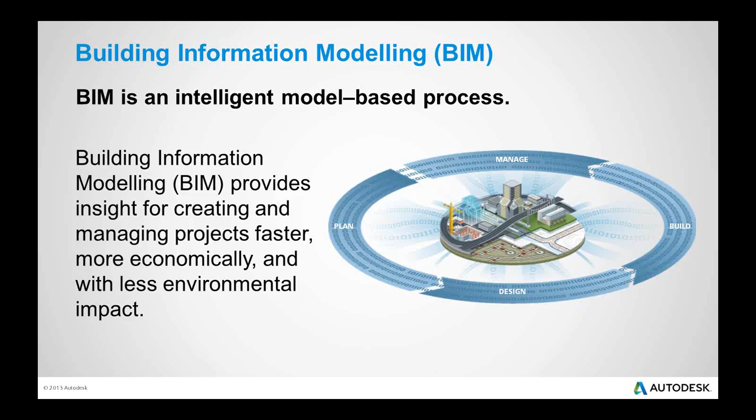Now, to introduce you to Revit LT, I'm going to be using a project, and I just want to give you a little background on it. This is a church in northern England that was renovated into apartment buildings. AutoCAD was used for some of the designs, and then Revit for some as well. I'll be using a Revit project to show you some of the things you can start looking at with Revit LT.

All right, let's go ahead and switch over to Revit. Now, if you are familiar with AutoCAD LT or AutoCAD, I may be using the terms interchangeably, but I'll try to be specific if there's something particular to one versus the other. In general, what I'm going to do is take you through and compare what you might be familiar with in AutoCAD LT to what you can expect if you begin using Revit LT.

Before I get into the details, I want to take you into a project, one of these apartments that has been completed or close to completed in Revit, and show you some of the power of BIM, of using this intelligent model-based design.

So it kind of looks like an AutoCAD drawing. If you just look at the floor plan here, we've got some standard architectural elements, our walls, windows, and doors. I'm going to zoom in to part of it here with this one room.

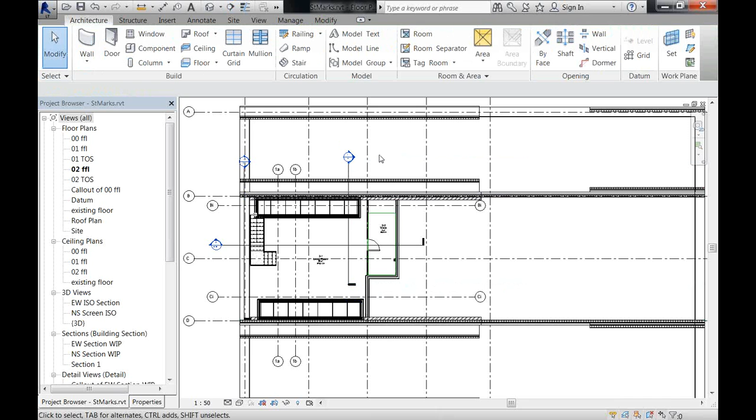So just that easy, I was able to create a section line, and not only did it draw the section line, which is what I might do in AutoCAD LT, but it actually created the corresponding view. If I double-click on this section tag, it automatically opens up that section view. This is similar to creating different views or maybe different DWGs in AutoCAD, each one having the geometry you want to look at for that particular section, plan, or detail view.

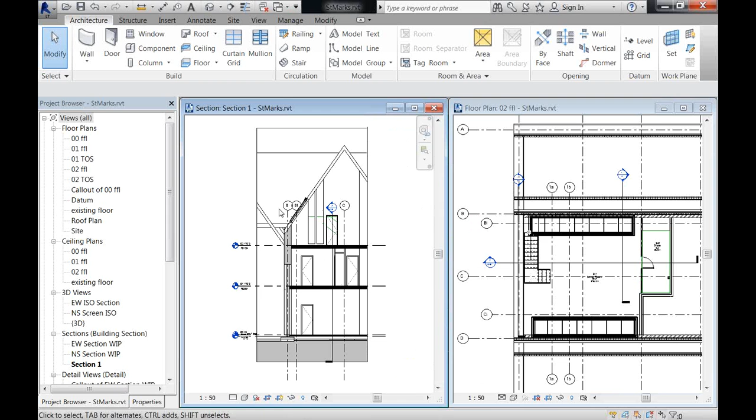I'm going to go ahead and tile these so we can see both drawings that I have open, and I'll zoom. Now, of course, this is completely controllable how much you see of the view. So very intuitive using grips.

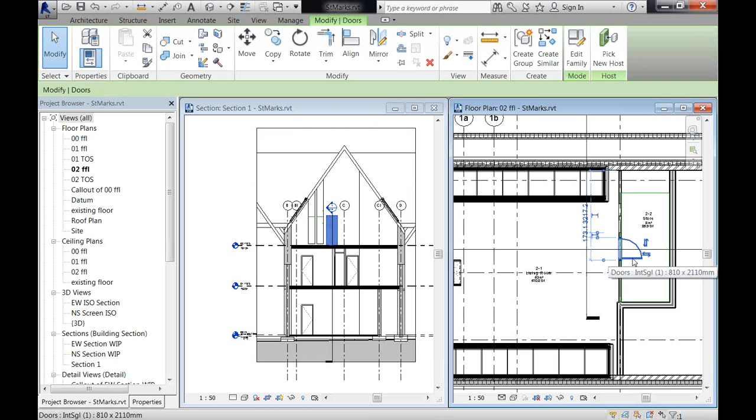Now, the power of BIM, as opposed to something more traditional with 2D CAD, is that these are all looking at the same geometry. So if you want to make a change — and we know that never happens in the architectural world, right? You've designed all these drawings, maybe you've got details and sections and all these different drawings about this particular room and this door, and now somebody realizes that the door needs to move.

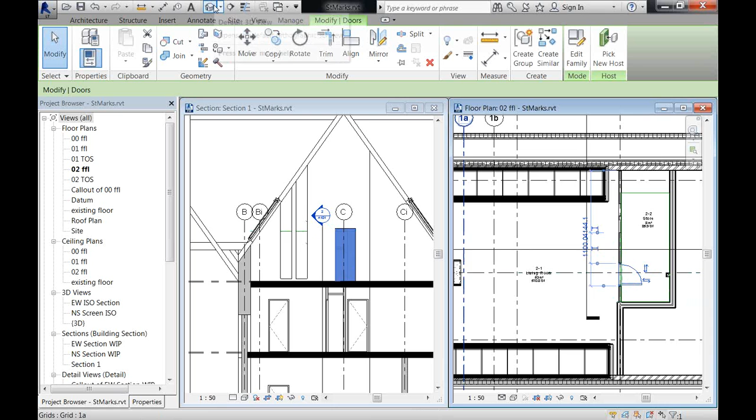So here in Revit, I'll just go ahead and select that door and move it down. And you can see that not only in my 2D plan does it move, but it also moves in the section view. And in fact, I can even open a 3D view of the drawing or this model.

I'll go ahead and tile that, and we can see that if I go ahead and select that door again, it selects it in every view. I can move it in any of these views. So previously I moved it in the plan view, but I could also, maybe for a better design idea, select it and move it in my section view.

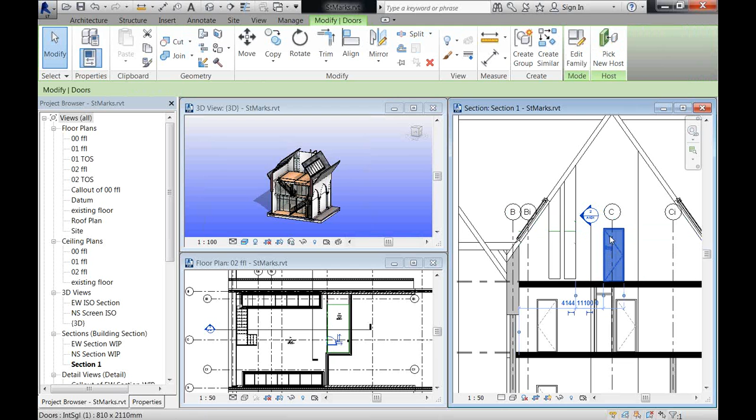So I can do that, move it further down. Or if I'm looking at my 3D view, I could also select it and move it in there. So whatever makes more sense — in any of these views, you can be modifying and editing your design and know that it's going to update.

Oops, I think I just deleted it. Let me undo that. Know that it's going to update in any of these views. So this is just a small example of the many — you can imagine this whole design, how many of these different related objects, windows, doors, walls, roof, ceilings, floors, all of these are related to each other here in a BIM environment.

Now just think of doing this in your two-dimensional AutoCAD LT drawing.

If you were to do something as simple as moving a door in a 2D plan, not only would you have to move the door, which would likely be a block in AutoCAD LT, but you would have to trim, extend and completely clean up this wall so it looks appropriate once you've moved that door. You can see here as I'm moving it in Revit LT, that it automatically cleans up all that geometry, in addition to cleaning it up in all those other views.

So that's just a quick look at a finished, or closely to finished, model in Revit LT. But if you're like me, you might look at this and think, well, that's great, it's all magic, but that's when somebody's already done all the work. So what I want to do is take you into a brand new drawing starting completely from scratch in Revit LT, and we'll just look at some of the similarities and differences compared to working in AutoCAD LT.

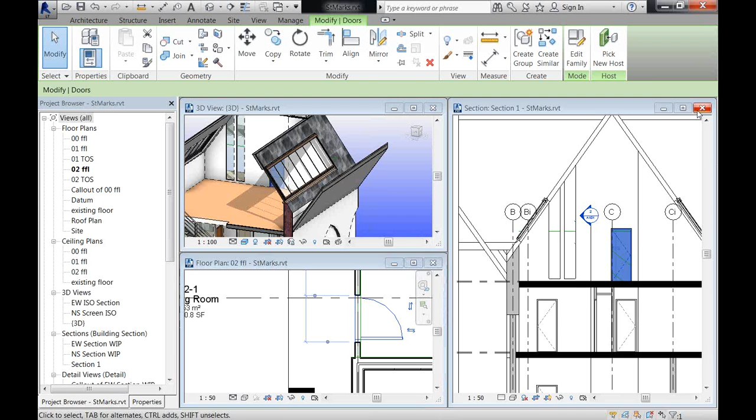So we'll go ahead and close these. And this will take us back to the default interface. As soon as you launch Revit LT, this is what you see.

Now this can look a little bit overwhelming if you're used to AutoCAD LT, because it does look different. But let's just take a look at what these different areas of this screen are.

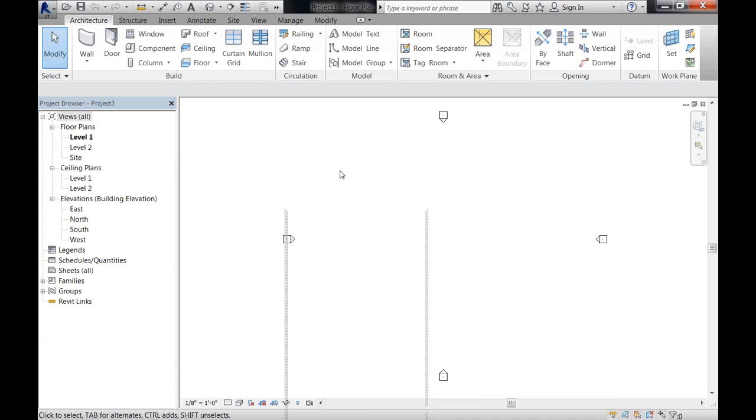So here I have the properties palette. I'm just going to drag it out so that it's separate. This is what we would probably see in AutoCAD LT, where we would have multiple different palettes that we could have open. In Revit LT, you can do that too. So I could drag this palette over and actually have them kind of stacked, visibly stacked.

But in Revit LT 2014, something that's different than what we can do in AutoCAD LT is that if you drag one palette's title onto another palette's title, they actually tab. So here I've got tabs to switch between my different palettes. That's kind of a neat feature that's more unique to Revit LT. So you'll see that I'll switch between these different palettes.

All right, so those are some of the things that are similar to AutoCAD LT. Let's go ahead and just start looking at some of the differences.

Here, our main tab in Revit LT is this Architecture tab. And if you dig deep, you'll actually see that you have tools similar to what we're used to in AutoCAD LT. If I go over here to this Model Line tool, for example, and click on that, it displays this contextual ribbon tab. I can see that it's contextual because it's green. I've got the green ribbon tab here, and I've got these green panels over here at the right. You may be familiar with that from AutoCAD LT as well.

There are certain things you can do in AutoCAD LT where you'll get a contextual ribbon tab, such as using the array, associative arrays, or hatching. So it's the same idea here in Revit LT.

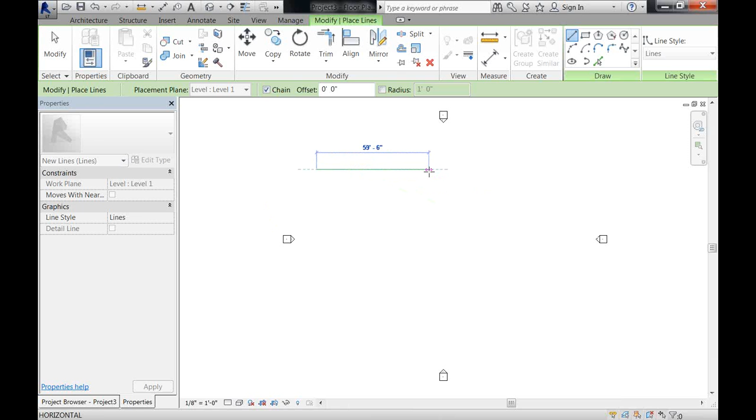For example, I have all these tools over here where I can draw a line. Let me go ahead and do that. Drawing lines and circles and arcs feels very similar. We pick our point, we can drag and type a value, and we can get the angle, just like our polar angles in AutoCAD LT. So this process, whether I'm doing lines or walls or other geometry, should be very familiar to you.

Here I've got my arcs and circles and other geometry that I can create. Okay, but this is just plain old geometry like I would have in AutoCAD LT. And that's not really taking advantage of the power of Revit LT, the power of BIM, which is those intelligent objects like walls, doors, and windows.

So while you can get into these tools, and there is a reason to use these tools, maybe you're creating a custom window shape, for example, and you need to design that window shape. You can do that with these tools and then create what would be kind of compared to a block or a family like I described previously.

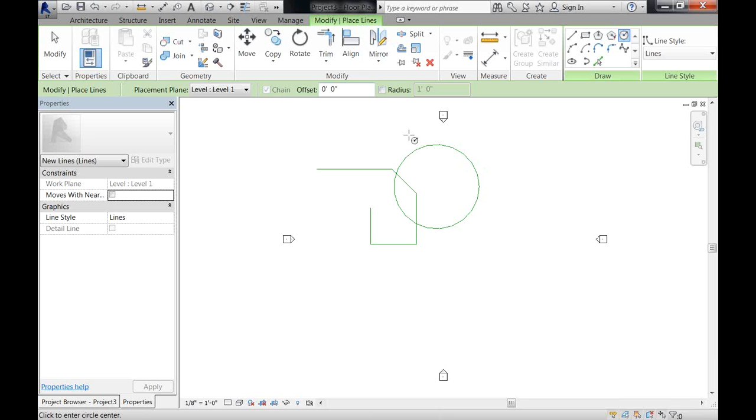Okay, but I'm going to go ahead and get out of this mode. So again, I know I'm in this contextual mode because of the green. If I want to get out of it, I can either press the escape key a couple times, once or maybe more, or you can always go over here to the left side.

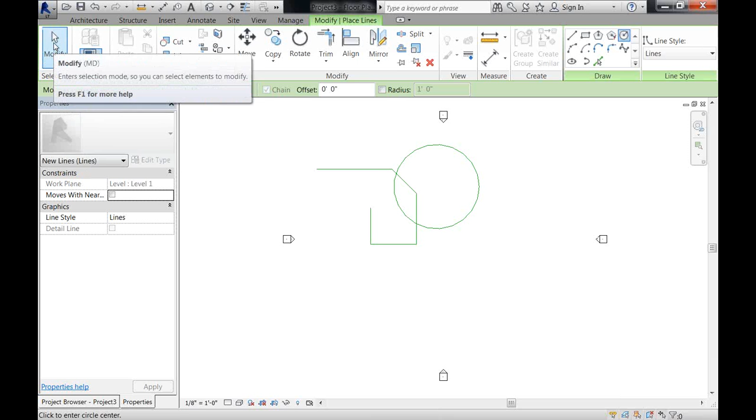Here I've got this Modify tool, and if you think about it in AutoCAD LT, whenever you're not in a command, you're always in this default selection mode where you can select an object and then do something to it. That is kind of what this is. Here we see it. We've got the Select panel here and Modify. So if I click on that, that is taking me to what would essentially be the blank command line in AutoCAD LT. Okay, so it's got no objects selected. I'm not in anything contextual, and it's the same as pressing the escape key a couple times.

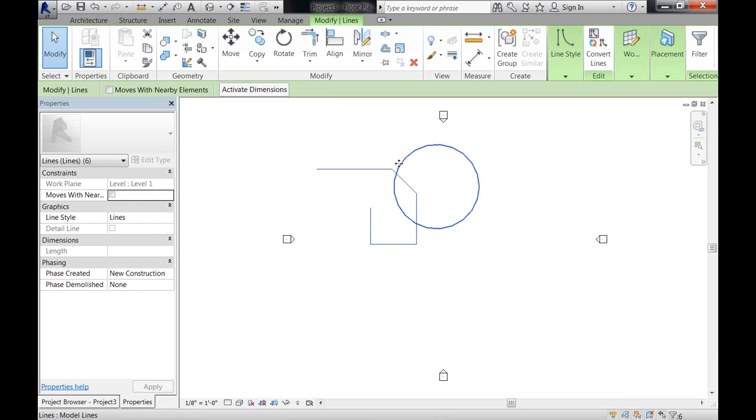Okay, so here I've got some geometry, but I'm going to go ahead and select that and get rid of it because this isn't really smart geometry. So selecting is very similar to AutoCAD LT. You can either pick an object or you can do a window, an implied window, right to left or left to right, depending if you want to cross objects or have objects fully selected. So all of that is very, very familiar.

I'll just go ahead and select those. I could right-click and choose delete, or we can use this icon up here, which is the delete or erase tool. Okay, so selecting should be very familiar to you.

All right, so in the drawing area, one thing that you might notice are these little icons indicating elevation. So by default, using this particular template, the default template that I used, it automatically created some elevation views, and it put in these icons so that those elevations will be marked.

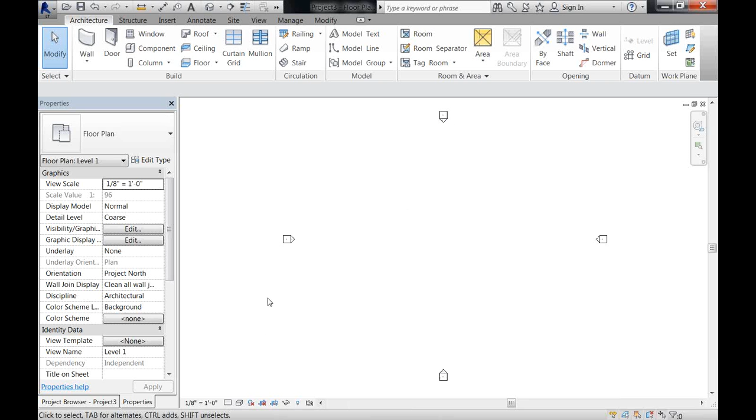Now, right now I have my Properties palette selected, so I'm going to go over here to my tabs and choose the Project Browser. And you can see that I've got these different elevations listed. So this is my north, south, east, and west elevations, and that's what these icons are indicating. We won't look at that right now because there won't be anything in it. Let's go ahead and draw some walls so that we can actually see something there.

All right, so since we're in this intelligent BIM application, Revit LT, instead of drawing lines, arcs, and circles, we want to draw intelligent walls, doors, and windows. And we'll go up here to our wall tool. And right off the bat, I can start drawing just like I would be drawing maybe a DLINE or an MLINE in AutoCAD or AutoCAD LT. So you see here it's showing 2 lines right here.

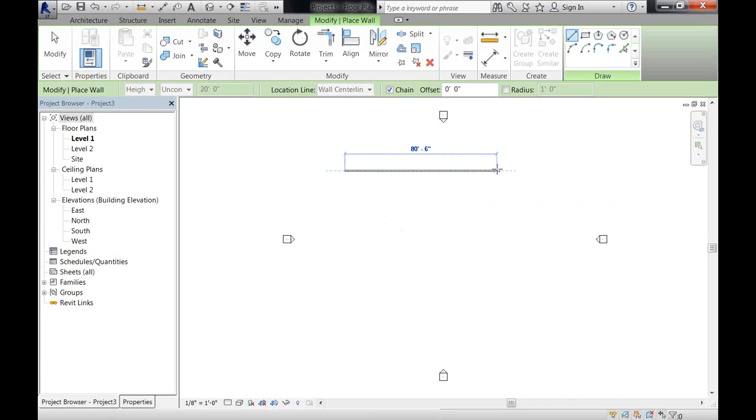And again, I can type values. I can use my object snaps. I can eyeball it. The nice thing is that if you're just trying to sketch out a design, it's really easy to modify later. So you can really focus on the general idea of your design and not worry too much about values because it's so easy to select and modify objects later.

All right, so I have some lines or walls down there, which is similar to my D-lines or multi-lines or lines that I have offset in AutoCAD. Now, one thing to point out that kind of threw me is, again, this contextual tab up here. In AutoCAD, if we were drawing lines or walls or double lines or something like that, once we finished placing those, we would automatically be back to our default command line.

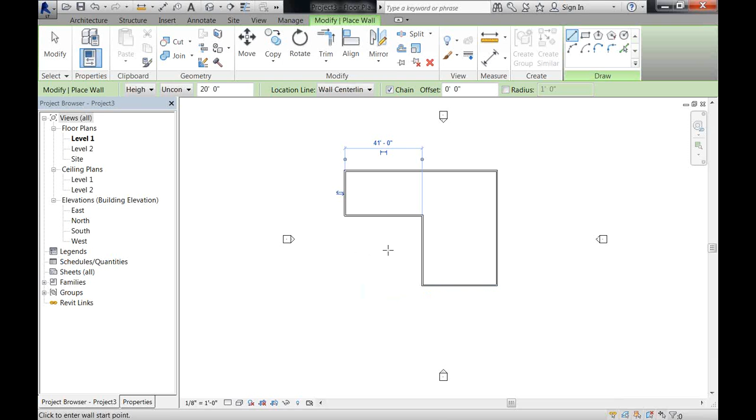But here in Revit, we can continue drawing these walls, and we stay in this contextual wall creation mode until we tell it we're done. So even though I'm creating various segments over here of walls, I'm still in this contextual mode that I can see up here by the green. Go ahead and undo that crooked wall that I just created.

So something to be aware of: if you're trying to maybe select one of these walls and try to move it, which is something we might do in AutoCAD LT, just realize that you're still in the contextual mode. Go ahead and press Escape or hit the Modify tool so that you get out of that contextual mode. And then you'll be able to select those objects just like you would expect and modify them very easily.

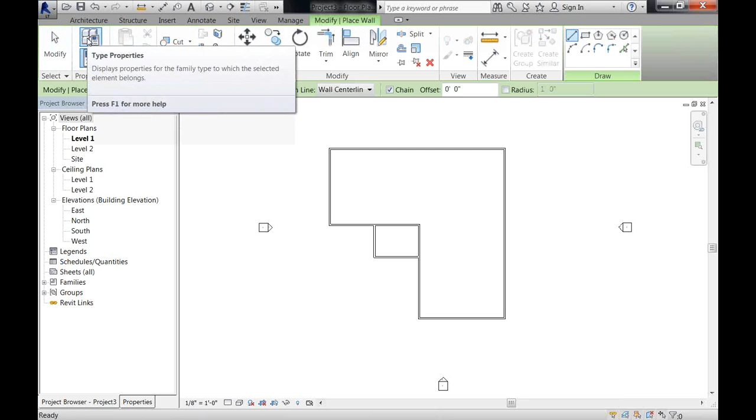Okay, so very, very easy. Don't have to do cleanup. The walls automatically clean up themselves. All right, so let's go ahead and create another wall, and I'll point out some of the other differences with Revit LT compared to AutoCAD LT. As we were creating the wall, we see this right here, this options bar that has tools or values that I can apply to that wall that I'm about to create.

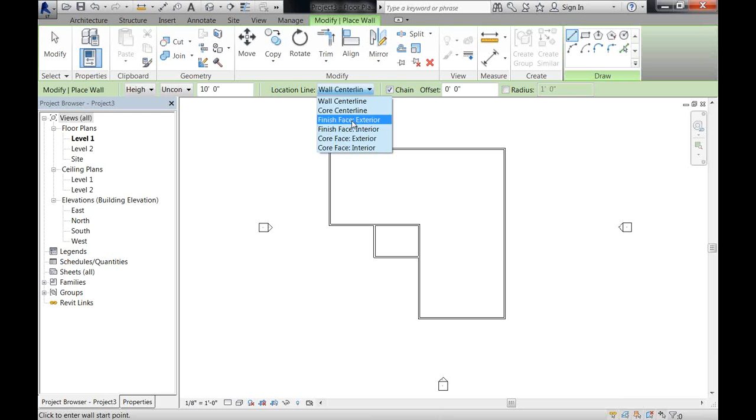So by default, for example, it created a wall that was 20 feet high. Maybe I don't want a 20-foot wall. Maybe instead I want a 10-foot wall. So I'll go ahead and change that value. As I was drawing these walls, they were drawing from the center line, but maybe I actually want to draw a wall that's from the finished face, we'll say the finished face exterior. Let's try that one. Okay, so you can modify these options, and if you don't modify them here, the great thing about this environment is that you can always select these objects and change their properties later.

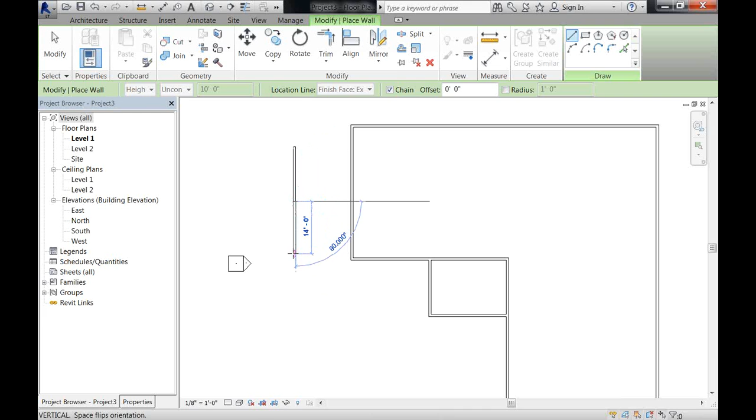But I'll go ahead and just pick a point to start drawing this wall, and you can see now instead of drawing from the middle of that wall, it's now drawing from the exterior face. I'll go ahead and pick the point and just finish off that wall. And if I select that wall, go back to our modify mode so that I'm in the selection mode. Now notice when I select that wall, I've got different icons here indicating, so when I drew it, it said that it was the exterior face.

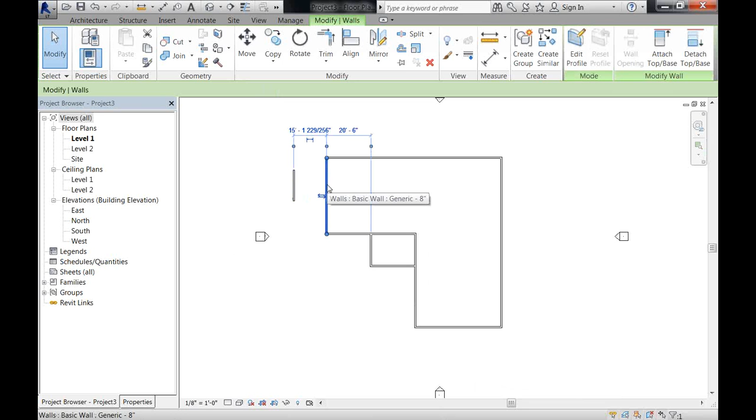That actually becomes important here in Revit LT compared to what we're used to working with in AutoCAD LT, because these walls have intelligence. There's an inside, there's an outside. Maybe we've got brick on the exterior and drywall on the interior. You actually can control what is the inside and the outside, and we'll take a look in a little bit at the materials and how those are defined. Okay, but again, the way that you work with it is very similar to AutoCAD. You select objects, you can modify them with grips, and in Revit LT, there's various different icons.

I'm going to go ahead and move this wall, just rotate it around a little bit. I want to see the height of it from this view down here. Okay, so we drew these various walls, and this one happened to be 10 feet, whereas the others were at the default 20 feet. Now let's go ahead and take a look at these different views. Here's the east elevation. There we've got the south elevation where you can see that 10-foot wall compared to the 20-foot walls. So we've got this 3D for free.

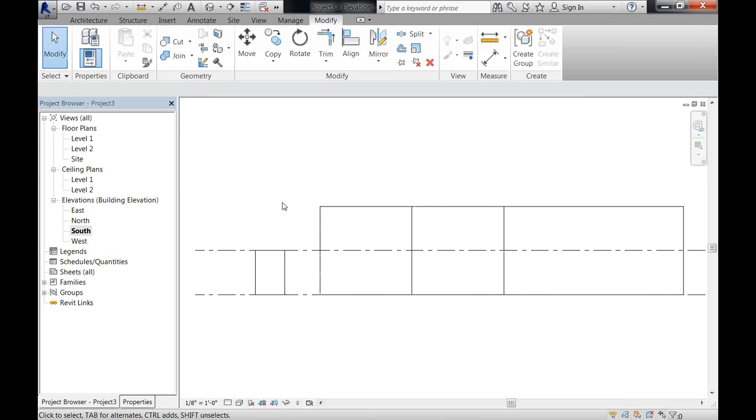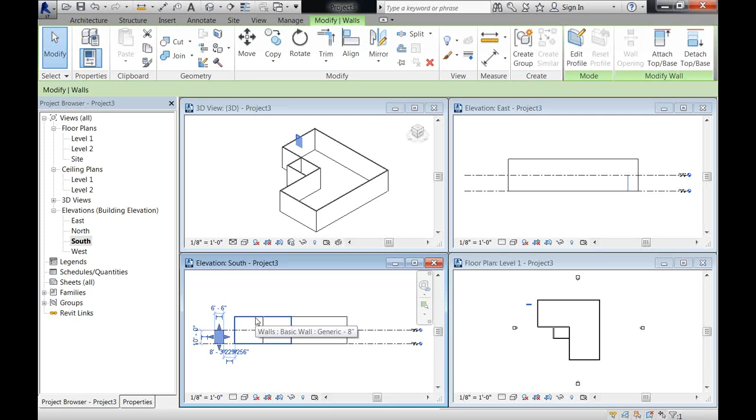If we go up here and look at our 3D view, and I'll go ahead and tile everything that I have open. So I've got my 3D view here and my different elevations. Even though we were drawing in the floor plan and creating it very much like we would in AutoCAD LT, it comes along with this height and these 3D properties just by default, just for free. So you do have to think about it. If you do want a wall that's 10 feet as opposed to 20 feet, or you want it to go from one level to another level, then you do have to think about it. But you have to think about that anyway.

If you're creating a project in AutoCAD LT, at some point you're creating the floor plan and then you're creating elevations and sections, and you have to think about what materials that wall is going to be and what height and how it's going to meet with the roof and what all of that is going to look like. The difference with working in a BIM environment with Revit LT is that you're thinking about those things as you design, so that when you're done, it's generating these different drawings, these elevations and sections and plans, and it has all of those components already together because you've been actually designing the way that you think, which is 3D.

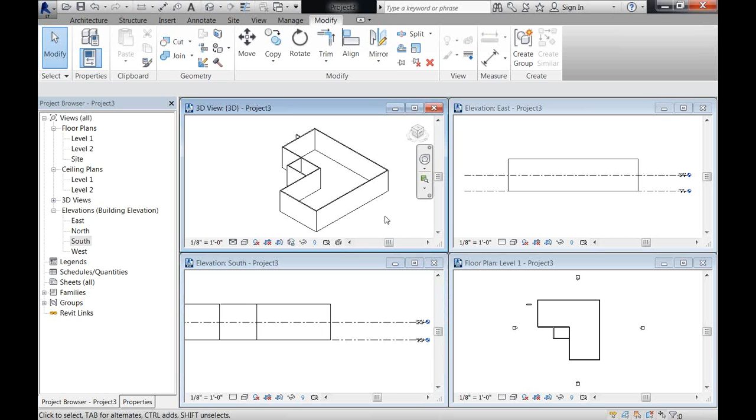Okay, so let's go ahead and take a look at some other things here. All right, so all we did so far is draw some walls.

Let's go ahead and zoom on that. And again, I'm using familiar tools like double-click the mouse wheel to zoom extents or roll the mouse wheel to zoom. It's all very familiar if you've been doing that in AutoCAD LT. So we have these walls. Now let's go ahead and insert some doors and windows.

Now in AutoCAD LT, we would insert blocks. And if we wanted to insert a door or window, say in the wall here, we would have to trim those lines away and clean it up. And if we moved the door, just like I showed you earlier, we would have to re-clean up all those lines. With Revit LT and these intelligent objects, it's much easier.

So we go to the Architecture tab. I'll go ahead and select Door. And if I go to the Properties palette, we can see a preview of what this door is that I have currently selected. And we can change the type of door or the different options, the sizes in this case. So here I can see different size doors that I could choose from. I'll just go ahead and select one of those.

And I'll insert it here. Now notice as I drag from one side to the other side of the wall, it changes the position of the door, which way it's flipping or opening. Okay, so I've inserted that door, but you may look at this list and think, well, that's not enough. I need other doors. That one's kind of simple. It's the same idea as with AutoCAD LT, and you have your block libraries. You can either purchase libraries, or it comes with some symbols, or you can create your own. In Revit, these symbols or objects that you use frequently over and over again are called families.

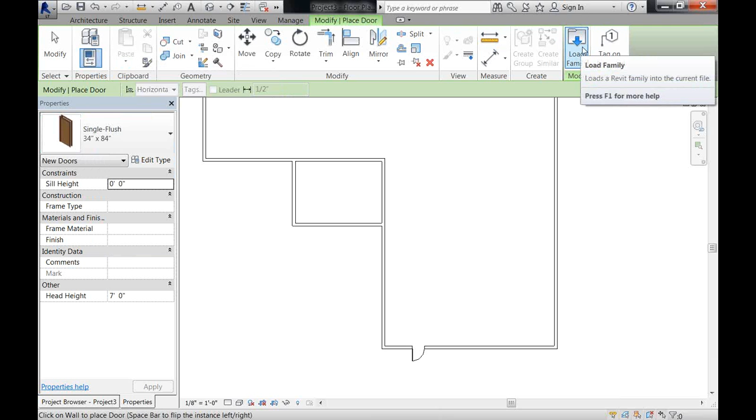So if I go up here to the door and I decide that one door style is not what I want, I can come over here to my contextual tab. Notice that it's green. I'm in this contextual mode. And I can choose Load Family. So I happen to be working with doors, but you can see here when I choose Load Family that there's all kinds of data out here. I can go into lighting or plumbing or windows. There's all kinds of different symbols or libraries that I can choose from.

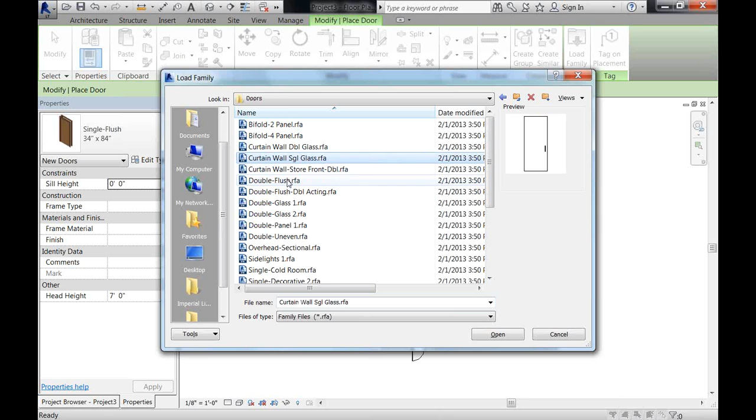Okay, I'm going to go to the doors, and here I can see different previews. It's got a double door with glass. Maybe we'll try that one. Okay, so it's kind of like inserting a block from some external file. You insert it into your AutoCAD drawing, and then you've got that block definition within your AutoCAD drawing to use. Similar idea here in Revit LT. I've just loaded this family. Now I have that definition in my drawing, and I'll just go ahead and insert this one version of the door right there.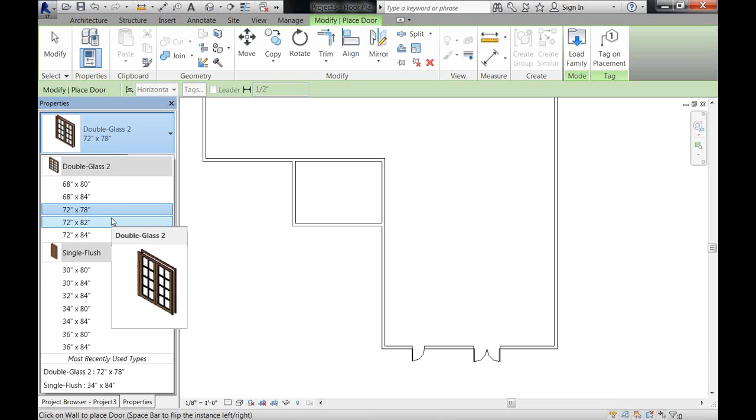But not only is this just one version of the door, we can see here, if I go into the drop-down list, that this double glass door has different sizes associated with it. So you can sort of think of that in AutoCAD LT as having dynamic blocks that you've defined. But again, these are much more intelligent. Okay, so here I've inserted my doors. I can do the same process for windows and other architectural components. Insert a window. I'll just insert a few of them while I'm here.

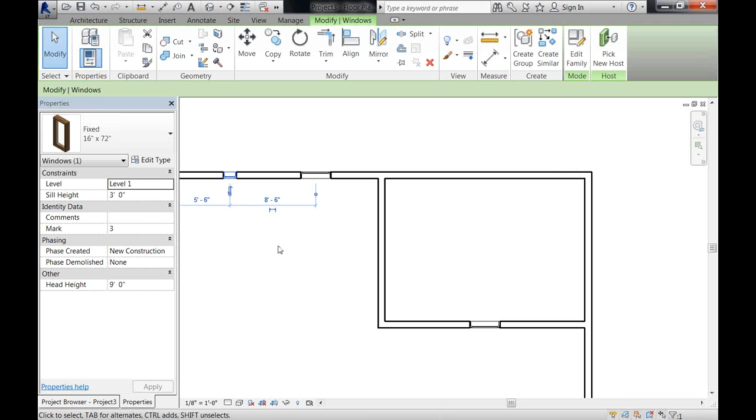Now, if you've inserted it and something's wrong, for example, I inserted these windows and maybe I don't have it going the right direction. If I select that window, notice it does have a directional component, just like our walls. So I can flip where that window is. I'll flip one direction and leave the other one the other direction. If it's not the right size, I can go in here and change its size. Let's do a small window for that. Okay, so easy to change, selecting from these different library options, basically these families.

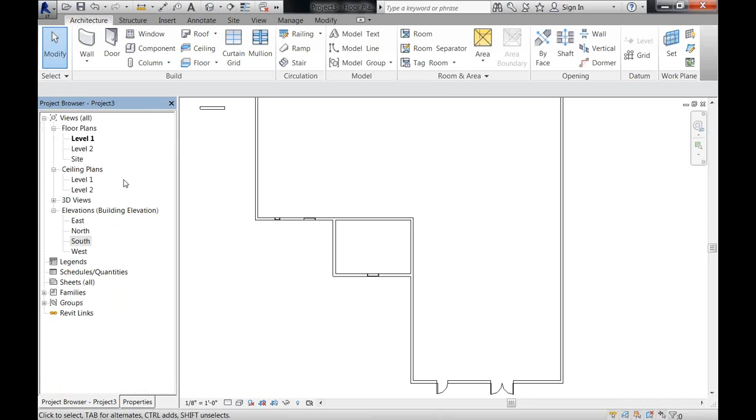Now again, we're getting everything for free. Just because we're creating this in our two-dimensional floor plan doesn't mean that that's all we've got, which would be the case if we were using traditional CAD. If we go to one of our other views, I'll go here to the project browser and open that south elevation again. And let's open the floor plan again. And I'll tile those so we can see them. Okay, so here we've got our floor plan with our doors and windows, and now we've got our elevation.

So these are just a few components. We looked at doors, windows, and walls, but you've got many other architectural components. Columns, you can create roofs and floors and ceilings, all kinds of different components, and have a lot of flexibility on what those look like.

But what I want to show you now is some of the different options for viewing. This is similar to what we have in AutoCAD and AutoCAD LT with visual styles, and actually it is called visual styles here in Revit as well. So for example, I'm looking at this elevation, and here we've got two different things that we want to look at. We've got detail levels and we've got visual style. Visual style is what we're familiar with from AutoCAD products.

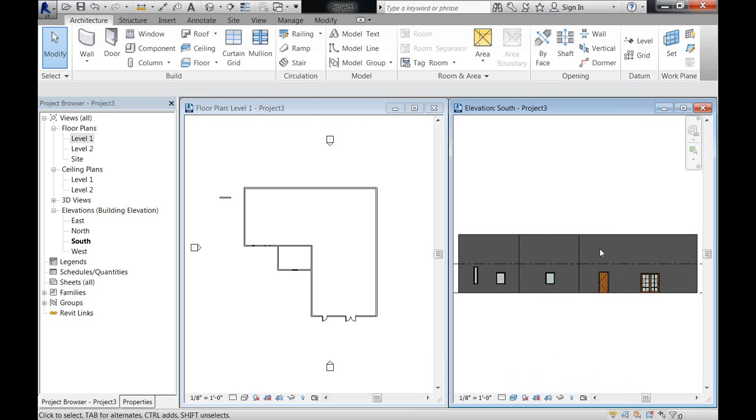If we look at that, we'll see that right now it's in a wireframe visual style, but I could change that to be realistic. Now in this case, I'm just using a very generic wall type. Maybe that's not what I want, so I'm going to go ahead and select this existing wall, just this one right here, and using my properties palette, familiar method, I'm going to change it to a different wall type, just like we change properties in AutoCAD LT all the time. But in this case, I'm changing it from one wall type to another wall type.

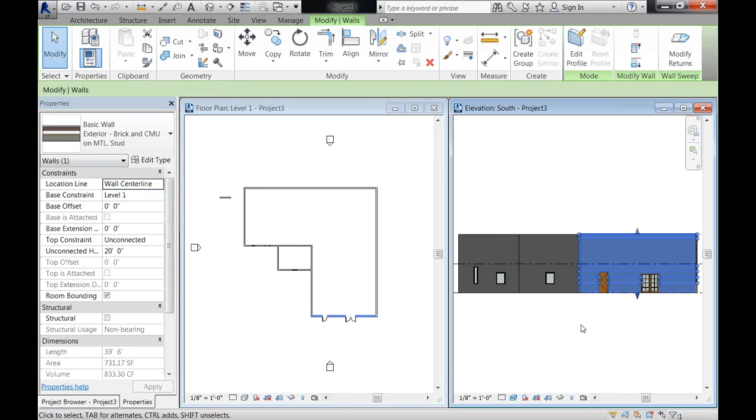Let's do something interesting like this exterior brick and CMU on metal stud. We'll go ahead and choose that one. And now, looking at this view, we could even open up our 3D view to make it more interesting. We'll tile all of those. So here we can see that that one particular wall that I changed to a different wall type has other properties. Now again, this 3D view is looking at it in a wireframe visual style, but I can go ahead and change that to realistic so that I get something a little bit more realistic to see. And we can see right through the glass windows, and we see the wooden door and the brick.

So again, part of this intelligence that we have with BIM is that these aren't just dumb lines, arcs, and circles. These are walls, and they have properties. They know that they have drywall or brick or other properties to them. They know how thick they are. It's not just a matter of drawing a line and offsetting it. That can take more thought up front in the process, but it's something as part of your design that you have to think about and have to decide on anyway. And it's very flexible, so you can always be changing these walls and their properties as you go.

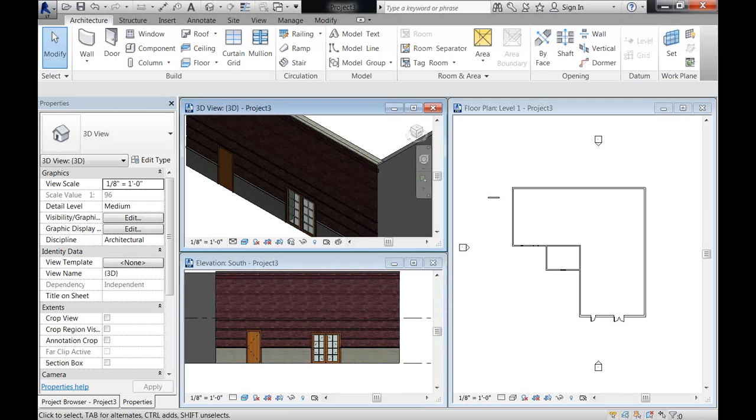But let me just take you in so that you can get some feel of what these wall definitions look like. How does it know to look like this, for example? Okay, let's go ahead and take a look there. We'll go to properties. And actually, say we were going to start a new wall right from scratch. Okay, you're going to create a wall. Right here in our properties window, we could choose from any of these standard walls. Or we can edit. Let's go ahead and choose edit type here.

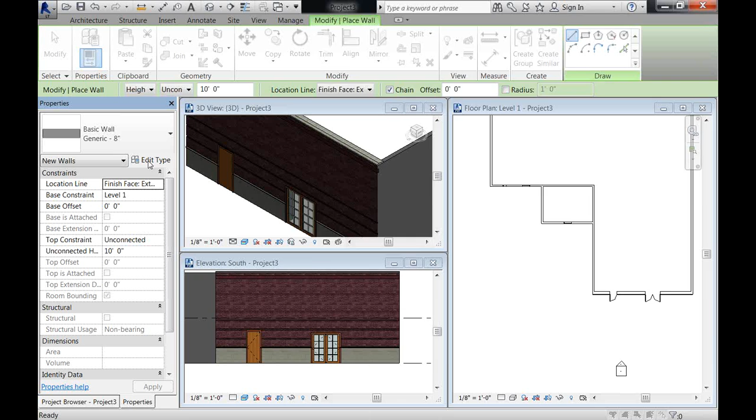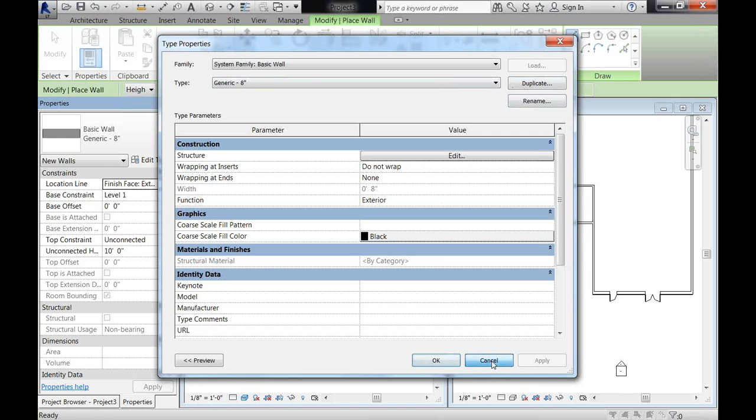This pulls up our type properties, and this is sort of like styles that you might create in AutoCAD. You might create a different dimension style or text style, something that defines properties that you want objects to have. Well, it's the same idea with walls in Revit LT. Here we've got this type of wall. We might duplicate it. Actually, let's pick a more interesting one. Let's start with that brick one. So I'll go ahead and select that, and let's do edit type. So maybe this is close to what we want, this brick and CMU, but let's duplicate it and create our own custom one. So I'm just going to call this Heidi's wall.

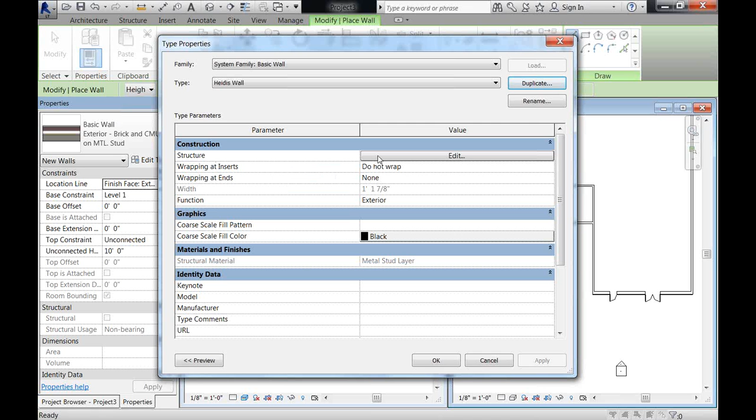Okay. Now there's a lot of different properties. We won't go into all of them, but the one that you're probably most curious about you would find here under structure. If we go over here and choose edit, so we've basically copied that existing wall type, created a new one, and now we want to modify its properties. Here, looking at this wall assembly, we can see different functions and different materials for these wall components. We've got our plywood layer, we've got the brick on the outside. Here we've got layers above because we had the brick above, and then we've had CMU below. So we've got a lot of different properties here, and we can customize how thick those are, what they look like, and what material they're going to use, so that when we look at it in a realistic mode, we actually see a material that applies to that.

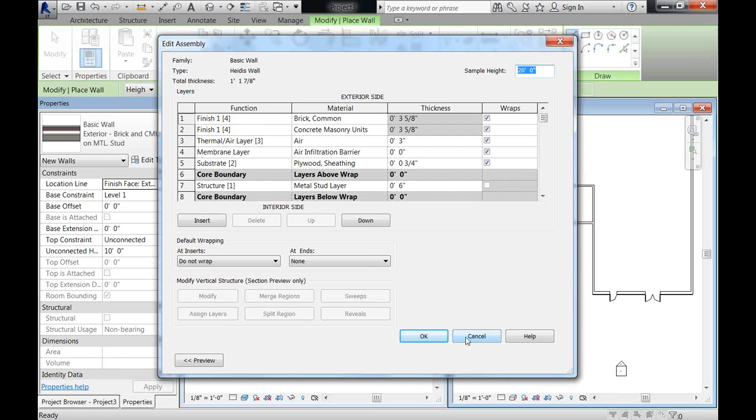So if you're completely new to this, if you've only worked in AutoCAD before and this whole BIM thing is new, this can look a little bit overwhelming, but think of the process very much like you think of any other styles in AutoCAD LT, and realize that these properties that you're applying are things that you would be applying or thinking about somewhere in your design anyway.

Okay, so that was just taking a quick look at a wall example, but you can think of the same process for other things like doors and windows and other properties or other objects that you would be having in your model.

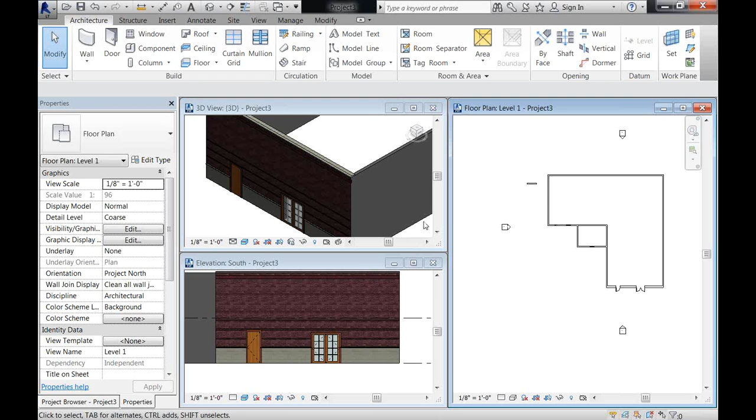All right, I know I ran through a lot of stuff very quickly. I'll show you one more thing, and then we'll open it up for questions and talk about some of the options you have if you want to start moving into this world of BIM with AutoCAD LT and Revit LT and the suite. But let me very quickly show you one more thing here. If we look at our elevations...

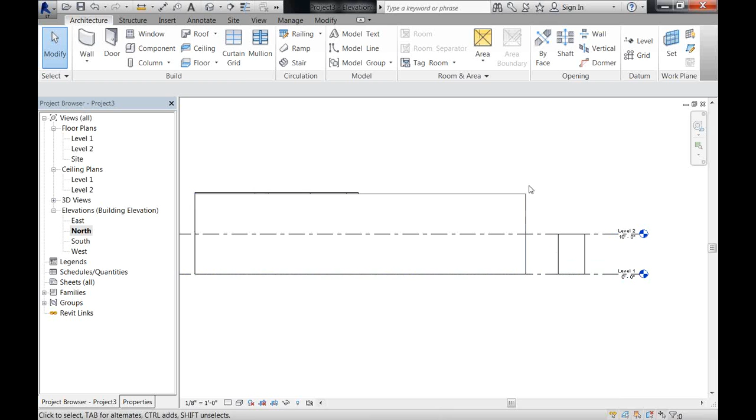One of the things that we drew, that wall happened to be 10 feet by default. But as you create your drawings, you naturally would have different levels. Maybe you have a 5-story apartment building, so you've got five different levels for those stories. The power of BIM and Revit is that you don't only have to enter specific values, like knowing that each of these walls would be 10 feet or 20 feet, but you can have them linked to each other. So you might have the wall property, the height of it, not necessarily be a value, but it would go up to level 2, wherever level 2 is.

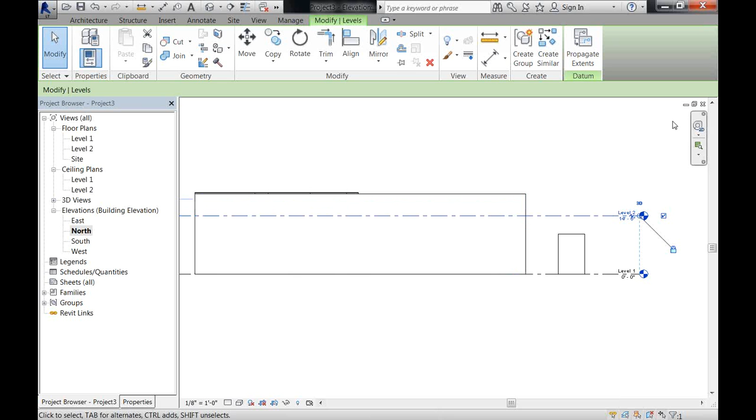And then level 2, if that changes as your design moves, right now I don't have that wall linked to it, but as you change that level 2 height, that wall goes with it. Think of the whole thing happening with your different components, like your roofs and ceilings and all these different architectural components, just like we saw in that model with the St. Mark's apartment that was more completed, where we saw things moving and adjusting. So just a quick look at some of those different components that you'll want to start investigating and be familiar with as you work towards a BIM environment.

All right, I'm going to go ahead and move back to the presentation. I know I talked a lot there, and I want to make sure we have enough time for questions.

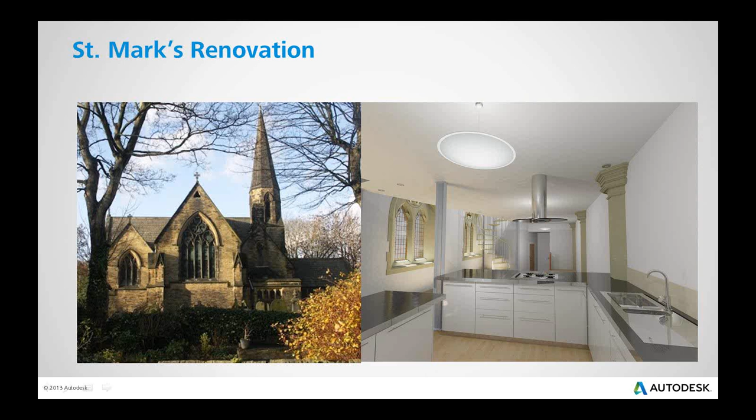And I think at this point, Gary, are you going to talk about the rental plans now? Yeah, real quickly. So, Heidi, thanks, Heidi.

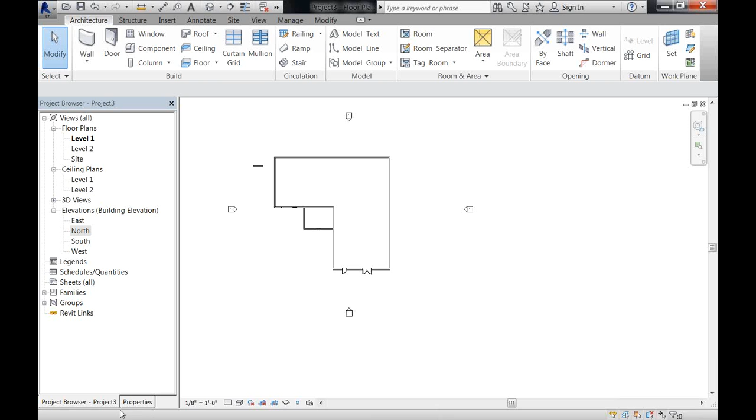Zeno is curious: does Revit LT also have shortcut keyboard commands? Yes, it's got a whole keyboard shortcut system where you can define several keystrokes to call up a command. Unlike AutoCAD, we don't have a command line in Revit, but you can see the shortcuts show up in the status bar. As you type a command, like W for wall, it starts showing you what commands might be available, and as you continue typing more letters, it narrows down that list if there's multiple commands starting with a W. That's one way of seeing your commands being entered through keyboard shortcuts - actually, the only way.

Here's another one: are the keyboard command shortcuts mostly obsolete since Revit has no command line? That would be no. There is a shortcut system in place in Revit, like we just showed.

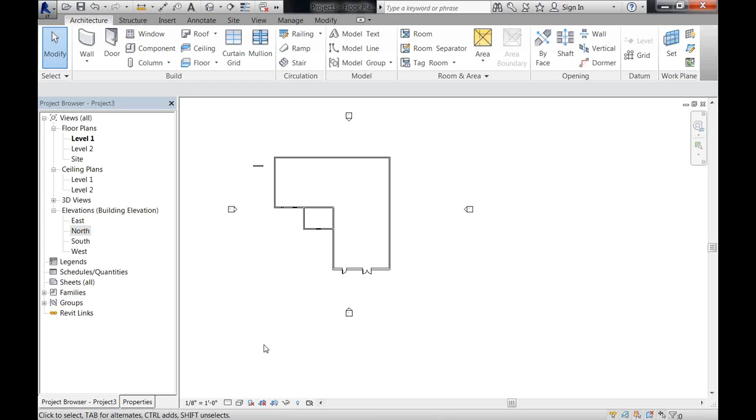This is from Richard: it is my understanding that earlier Revit LT limited structural components to parallel and perpendicular only - is this correct, is it still true, and if so is there consideration to change this? I was trying to think back on the changes - we didn't make any changes to structural elements from 2013 to 2014, so if that was a limitation in the past, I can't recall if it still is. Heidi, if you can pull up the structural column, we can probably check right here.

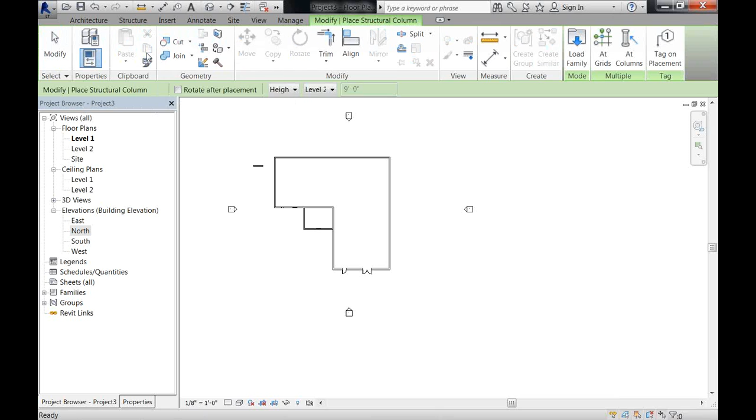We haven't made any changes between releases, but I can certainly take that back to the product team as a request if it doesn't exist. If you go to properties, I can see it pretty quickly.

Cool, okay. Douglas is here. No, so yeah, you can't do sloped columns.

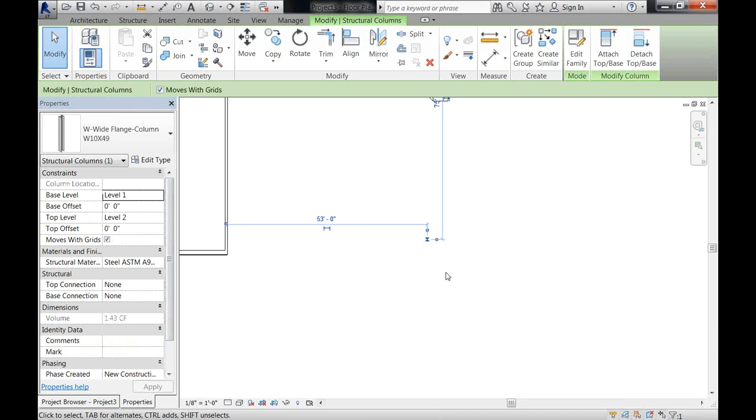Douglas is asking how you change room dimensions to go from the center of the wall to the inside face of the wall. This is a little technical, but there are room settings in Revit where you can define whether you want to go center line of wall, face of wall, or face of structure. From there, it'll calculate the room volume or room area accordingly.

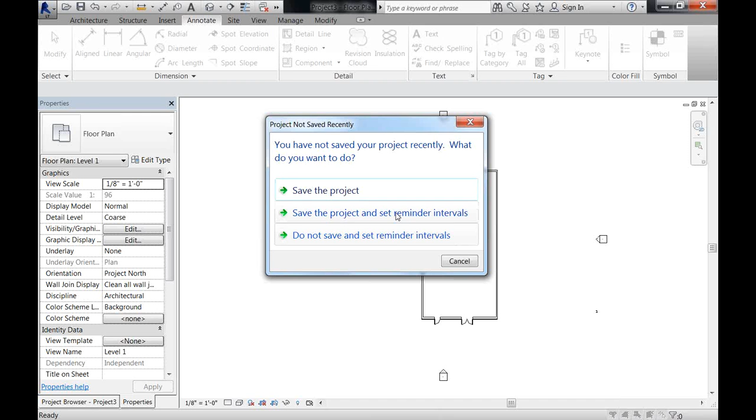What is the major difference between LT and the full version of Revit, and what was removed? We kind of covered that in the first question. The three major things I noted, plus there's a better list on Autodesk.com.

There's a question about rental. Is rental available on Revit as well as Revit LT? Gary, I think it does.

You can access Revit through the Building Design Suite, which is available as a rental option, but the standalone full version of Revit currently is not available as a rental, only as a perpetual license. Same for Revit LT - the AutoCAD Revit LT Suite is the way you can access standalone Revit or Revit LT on a rental basis.

Okay, so Gary, going to the subject of rental, what are some frequently asked questions that you've encountered so far? Would you like to share that with us?

A few questions we've seen around rental: what happens at the end of your rental period? If you're renting for 3 months, you can renew that rental and continue, or transition to a perpetual license. The rental software works just like the perpetual desktop software, so anything done using the rental software can be accessed using the perpetual license software. Similarly, if you're exchanging files with others working in a rented version of Revit LT, you can share those files with someone using a full perpetual license. It really works just like the regular desktop software - just a different way to buy and access the software depending on your needs.

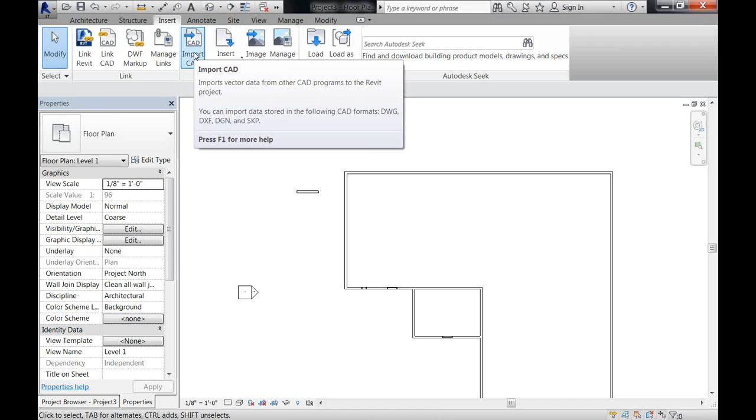Let's do two more questions, I've found these very important. This one's from Stephen: you didn't really touch on layers and line weights, how much control do you actually have? And what about conversion between AutoCAD and Revit seamlessly?

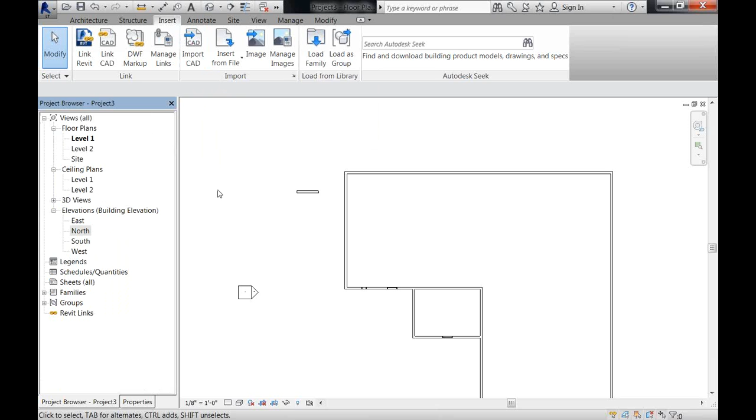I think it's a pretty smooth transition. Specifically around layers, Revit doesn't have a layering system like AutoCAD does, but they do have what's called categories. So walls are their own category, furniture is a category, and you can start defining things around your model that way. As far as line weights go, there is a way you can define them. It's somewhat managed by Revit, but not to the extent where you can't go in and start changing or making adjustments to the line weights within the system.

I don't know, Heidi, do you have anything to add from your history and experience? Not on the Revit side. Okay, cool. One last question.

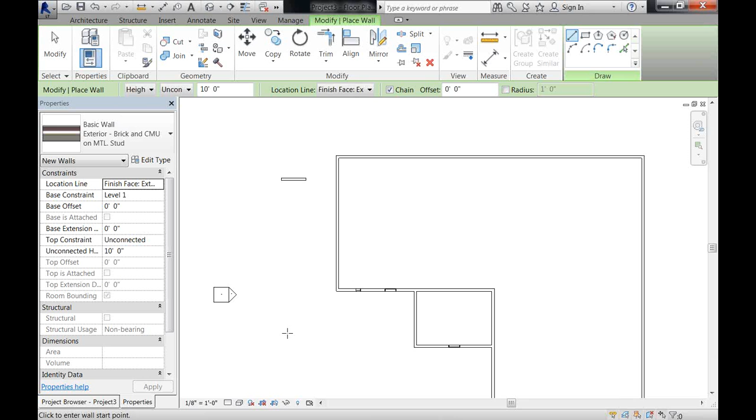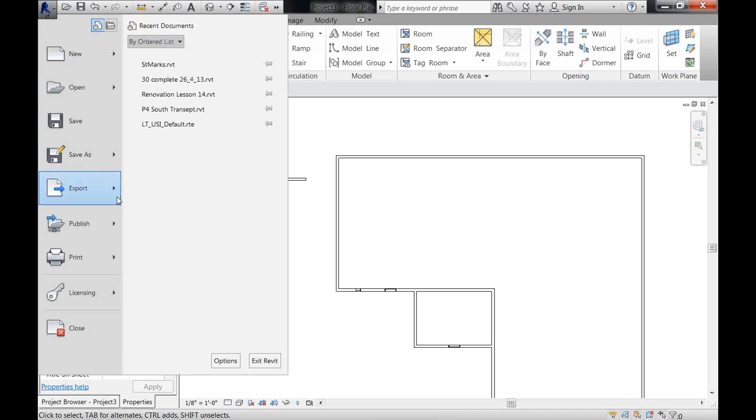This is about the IFC format: how is it with the support for IFC formats for export and import? With 2014 we added IFC support, so it has the same support that full Revit has, so anything you can do in Revit. I believe we are certified for export, for the latest standard, 2x3. For import, we're in the process of looking into that. So we fully support it in both directions for Revit.

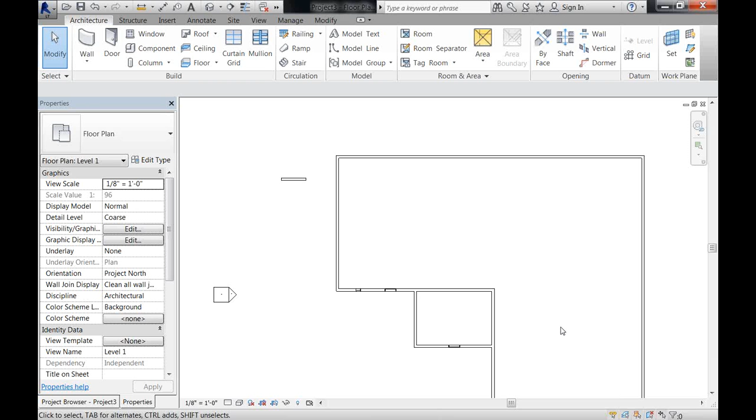Okay, in this case, Heidi, I guess I'll take over speaking duties. Okay, great, cool, thank you. All right, thank you all. All right, I will make myself the presenter. Cool, let me know if you guys can see my screen.